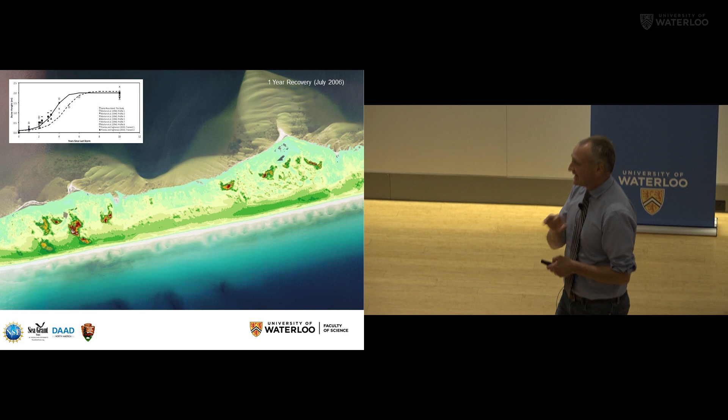What's more important is how does this actually start to recover? How does the sand get back to the dunes? How long does that take? And what we found was the first data to show that in fact it can take upwards of a decade for the sand. So what was actually 5 hours of one storm takes 10 years to come back.

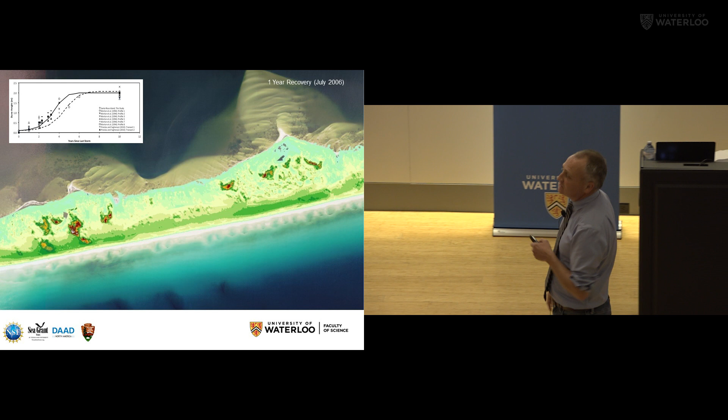Now that becomes a big problem when we start to think about the resiliency of these systems, and it's the one reason why we run a program called Coastie. This is in partnership with Parks Canada, and this is a citizen science program where you put your phone into a cradle and you take the same shot that everybody takes on that beach. And we are close to 5,000 photographs in a year and a half.

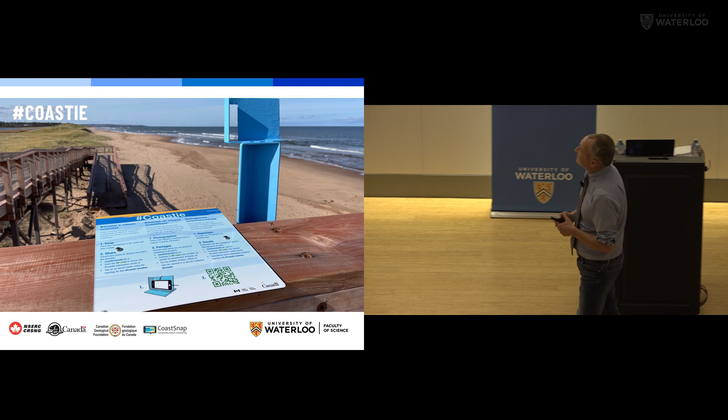And it's from around Parks Canada sites, particularly in the Maritimes and Ontario, and we're moving to British Columbia later this year. So as I said, it's distributed, so it's mostly in the Maritimes right now. We also have sites at Point Pelee, as well as the Bruce Peninsula and Pukaskwa up in Lake Superior, but we are moving to British Columbia and the Pacific Rim, as well as up into Nunavut next year with these sites, and it provides us unprecedented access to coastal sites.

And the reason why this is important is that myself and one other faculty member who just happens to be across the road at Wilfrid Laurier were the last two coastal erosion people in all of Ontario. And if you look at all of Canada, there's 5 of us. We have the longest coastline in the world and the smallest number of people who are actually studying coastal erosion. So the more people that participate through our program in Parks Canada, the more eyes, the more scientists that we are able to work with.

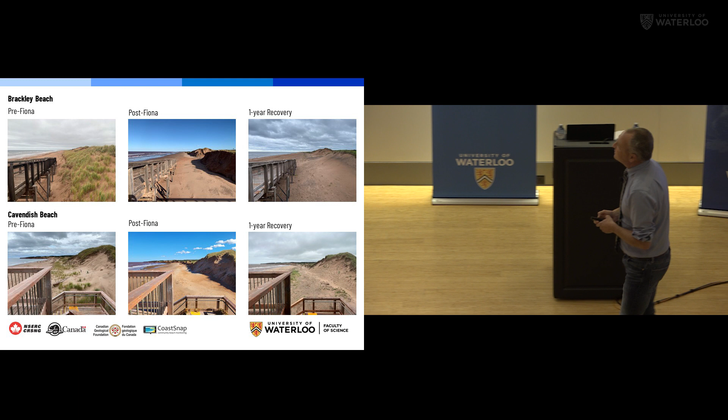And it's because of that that we were able to see what happened with Fiona. And so if you saw The National on CBC, you would have seen these photographs before. This is the Coastie shot just before Fiona at Brackley Beach, that one you saw in the drone shot before. This is the day after. 15 meters of dune was lost in just a couple of hours.

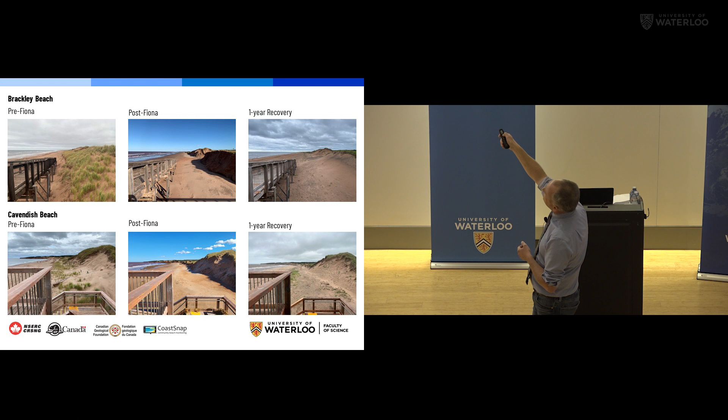And what we have seen today, and this is just yesterday, that's all the sand that's piled up. Now that looks like quite a bit compared to this. That's piled up because it's sitting behind a boardwalk. It's sitting behind an obstacle. If you actually look further down, the dune has hardly recovered whatsoever. We're looking at several years before these dune systems recover.

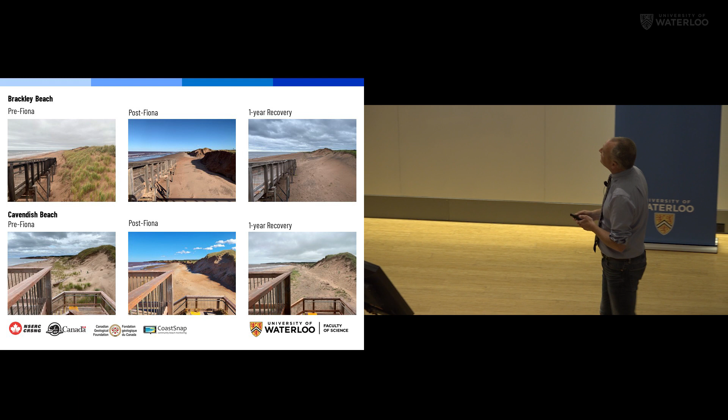Cavendish, this is the Anne of Green Gables site. Here's before, here's after, and that's yesterday. We just aren't seeing the recovery. The problem is not necessarily that these storms came through, it's that last week was Tropical Storm Lee, and it was bearing down towards Nova Scotia and PEI.

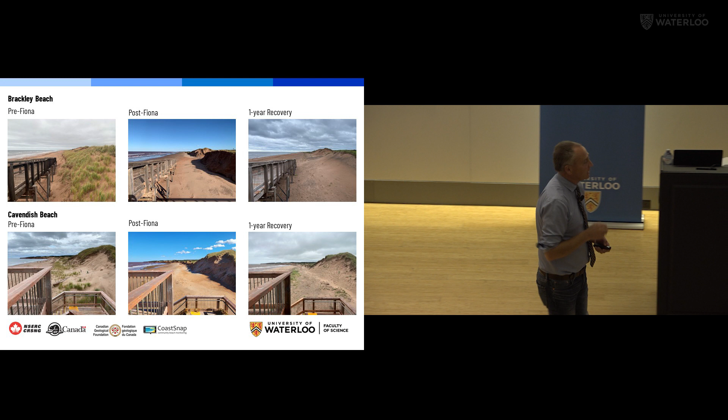Now, I'm a coastal erosion person, so I actually want the storms to go right up to my site. But if it hit on Prince Edward Island, these dunes would have been gone, because that was all that was required to take them out. What we're going to see over the next couple of years is unprecedented in the number of storms that are going to hit, how quickly these dunes erode before they can begin to recover.

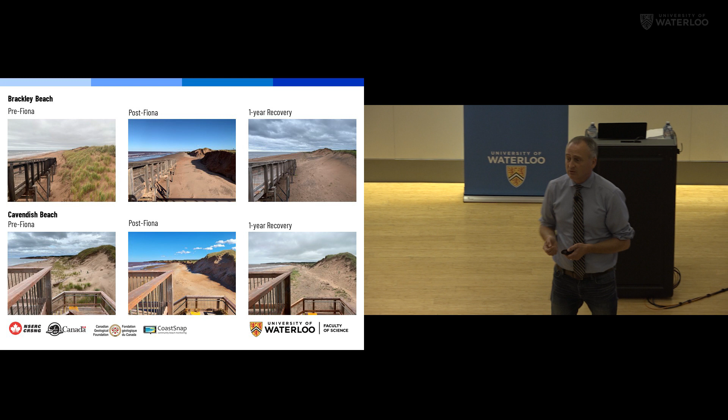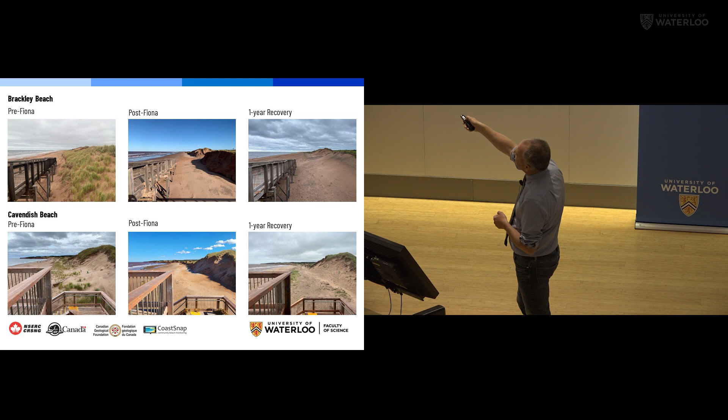Last year, there were 3 days when there was ice on this beach, which meant that every winter storm was able to come up and hit the base of the dune, and any recovery that we saw right after Fiona was gone. So it's not the big storms, it's not sea level rise, it's sea ice. And I'm going to show you a little bit later that lake ice in the Great Lakes is one of the biggest problems that we face.

Now, how do we deal with something like this? This is something called managed retreat. In a natural environment like this one, it's fairly easy. These beach dune systems are naturally dynamic.

But in the vast majority of our coastlines, what's behind there is infrastructure. It's roads, it's buildings, it's properties, it's livelihoods. In order for these coastal systems to be able to be resilient with sea level rise, changes in storm activity, and the loss of sea ice, you're going to have to require that people are going to lose their land, they're going to lose the roads, their houses. That's a very difficult management question. And this is managed retreat. Allowing things to move backwards is what we're also going to face in the Great Lakes.

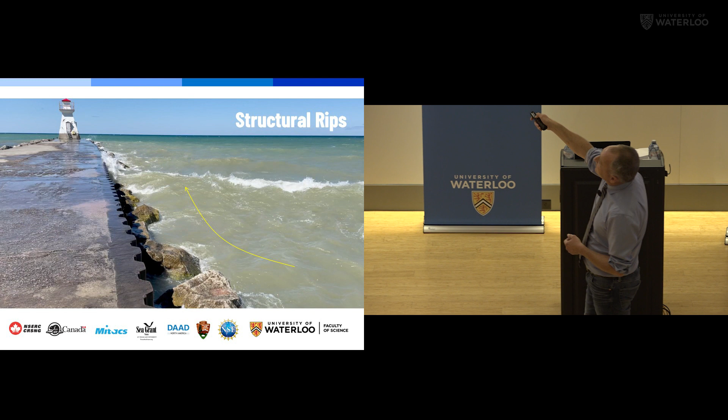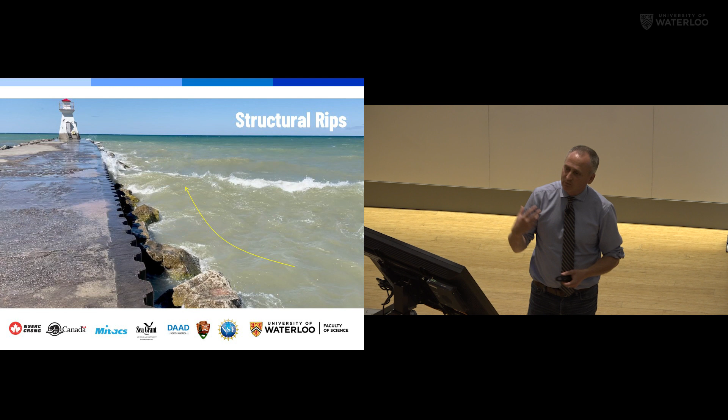Here's another one. This is Southampton. There is a rip current going straight off right here. But could you imagine falling into this water, being churned around? You don't know. So I've been in rip currents. I'm going to show you the one I've been in in a second. And when I take students into the field, we purposely get into rip currents. Now, we wear life jackets, we have lifeguards on the beach, and we have surfers out in the water.

But we get into these, and you're up and you're down, you're turning all around. You don't know what's left, right, up, down. You can't figure your way out. And when you get into something violent like this, it's really tough to be able to find your way out before you get out into the water. But this is one of the biggest problems.

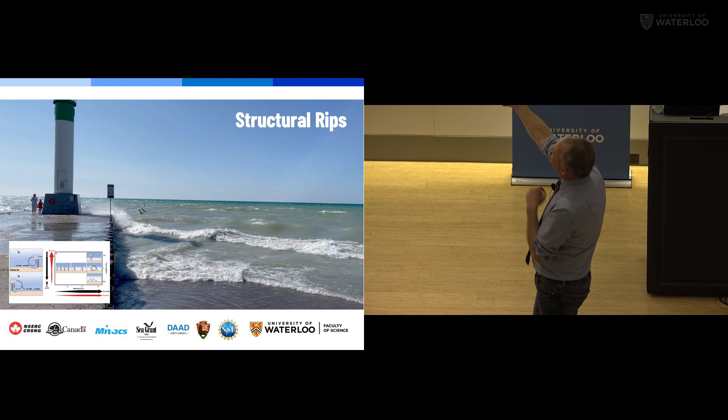Watch this kid. I told him off three times. So I did the boomer thing. I just said I'm a boomer. Okay. I did the boomer thing of telling this kid, don't do this. But if you look at the sign very carefully, the sign's backwards.

This is Kincardine. There was a drowning in Kincardine on this pier, on this side, three weeks ago. A family just simply got into the water, and a grandfather and their young grandson got into the water. They just jumped like that. There's a rip current right there. People just ignore signs.

In the Great Lakes, approximately 50 people a year drown due to surf. That means to waves and currents. The majority of them are young males, less than 30. Ontario has the highest proportions of drownings in the Great Lakes region. We only have 7 beaches in all of Ontario that have lifeguards. No other beaches have lifeguards. Kincardine has had many drownings, and has 0 lifeguards.

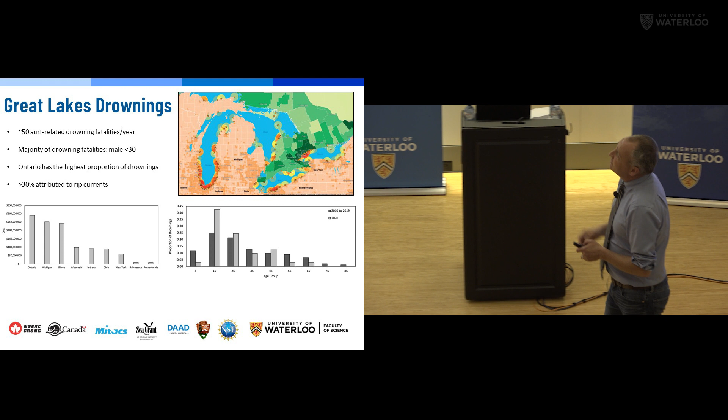Most of those, about 30%, are attributed to rip currents, but that's what we know, that they were directly into a rip current. We don't have a lot of information about that.

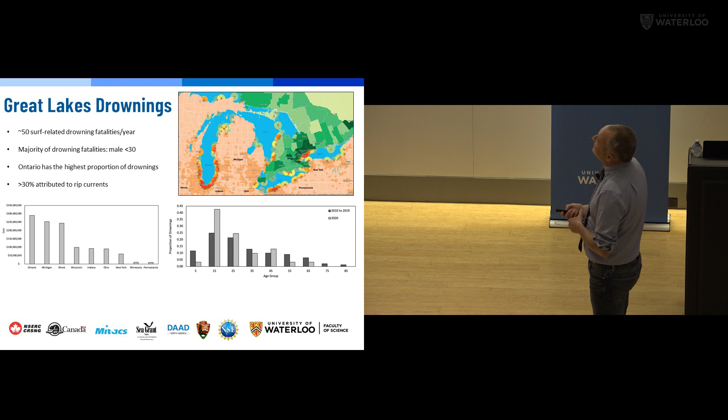Now, COVID was a big year for us to better understand drownings. What we were finding, and these lines that extend above, those were the COVID years. So during 2020, when everybody was in lockdown, you couldn't go anywhere. So the moment the lockdown stopped, people got out of their house. You couldn't travel internationally. You couldn't really travel far, so you went to your local beach. And what we actually found is that drownings increased significantly right after COVID.

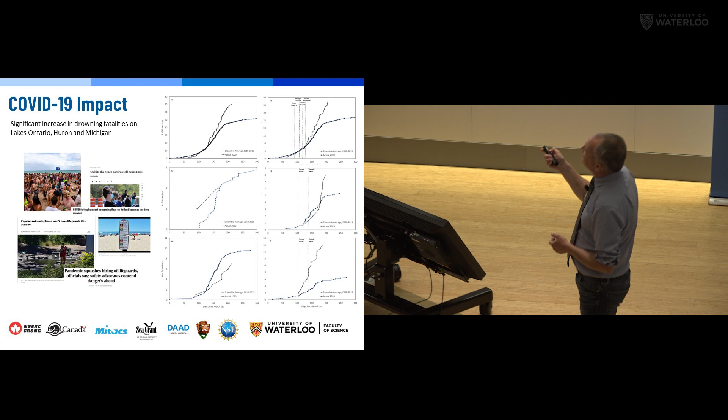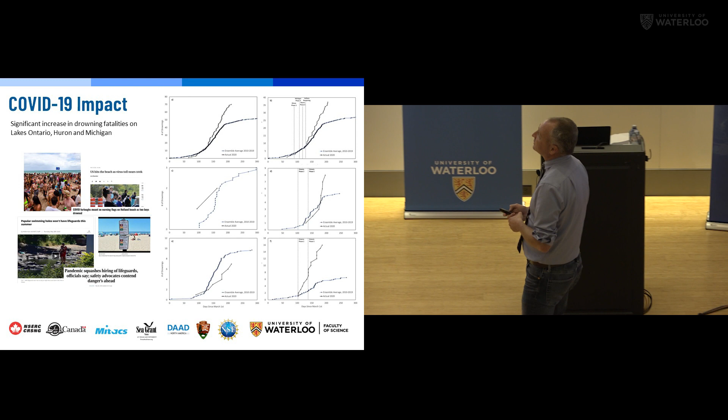And if you're going to a beach, you're going into these conditions, you're just being locked down. Why would you pay attention to a flag? Why would you pay attention to a lifeguard? And around most of the Great Lakes region, lifeguards were no longer on life-saving duty. They were on COVID duty, making sure that people were separated versus when they were in the water. So COVID created a spike in drownings, not only in the Great Lakes region, but across the world.

Now, why that's important is that when you look at all the drownings in the Great Lakes between 2010 and 2020, it cost this region $1.1 billion US. Because most of them are young males, less than 30. So if you think about the value of a statistical life, you've now lost an entire set of generations who are no longer contributing to the economy. And as a result, we have the direct costs and the indirect costs associated with it.

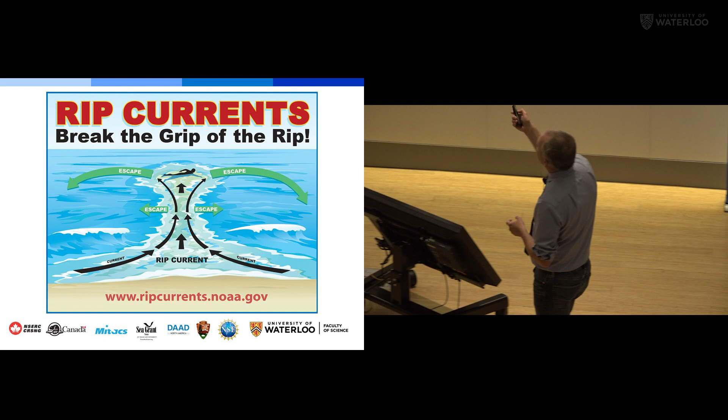The problem that we start to also face, and this is the original sign that was taken with that family in Pensacola, is that these signs are completely wrong. You probably have seen them across Canada, you've probably seen them across the United States. The image is wrong. And this is where I started working with psychologists and social scientists and opening up a new area of research. It's a view from nowhere. The water color is wrong. It looks rough there. It's green arrows, and the beach is in the wrong angle. This is what a real rip current looks like from the ground. Look at the difference between the sign.

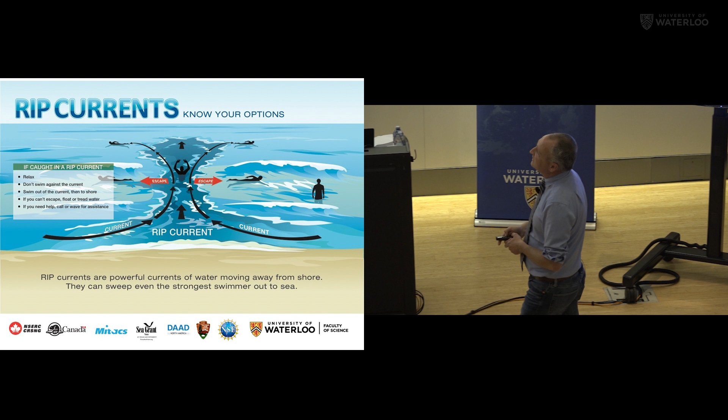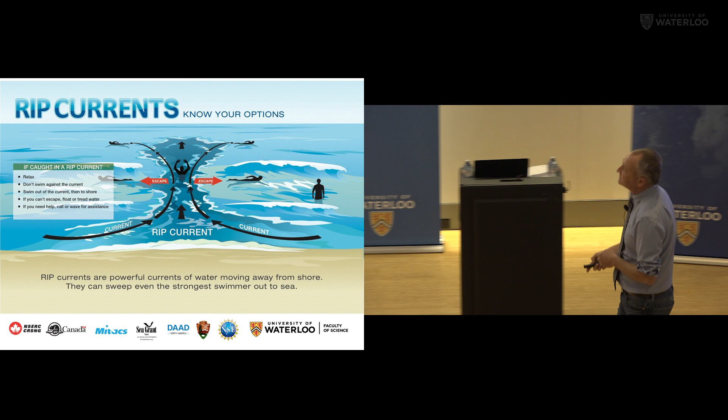But most importantly, and again, I'm going to come back to the sand here in a second, but I work in sand, I look at beaches and how they erode. The thing that I take home is that the work that we are doing is saving lives. So in Costa Rica, which I just happened to be working in many years ago, people approached me and said, can you send us a copy of your paper from Pensacola, Florida? And I sent them a copy, and I said, I'll do one better. I'll be at your office tomorrow morning to talk about rip currents in the country.

And as a result of our work in Costa Rica, where a lot of those pictures were from, we now have a legislated lifeguard association. Every major tourist beach has to have a lifeguard present. And it's because of this simple work, that family that first went down. This is what I take home at night, that this is the thing that you can make the biggest impact on. We've done just a recent paper looking at the value and the cost of drownings in Costa Rica. On average, every drowning costs $2 million to the local economy.

And it's a huge impact that they need to start to consider, because these lifeguards may combined get paid $20,000 a year. $20,000 a year versus every drowning is $2 million.

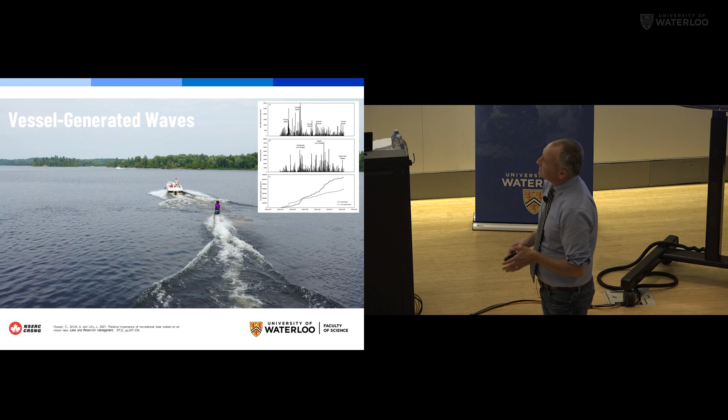Some of the work that we've also done in some of the kind of cottage country lakes,

and wow, this video is very sketchy. I did lose the drone right after this video. I didn't realize how bad it was, because I'm driving the boat right now. That's my son in the back. My daughter is taking the video. But the next video, my daughter was driving, my son was water skiing, and I was flying 1 foot off the water behind him, doing this kind of ESPN type thing, except that I missed the wave. I hit the wave and shot my drone straight into the water. I've gone through a lot of drones.

But what we have found in cottage country lakes, and this is where our cottage is, is that 80% of all wave activity is generated by boats during the summer. And so as a result, you've got this increase in wave energy, you've got shoreline erosion, and you've got, again, nutrient loading within your lake. And this is something that we're hoping to be finishing up in this coming year, and we have about 600 different sites within Ontario. But now let me get to Great Lakes shoreline erosion, the main focus for tonight.

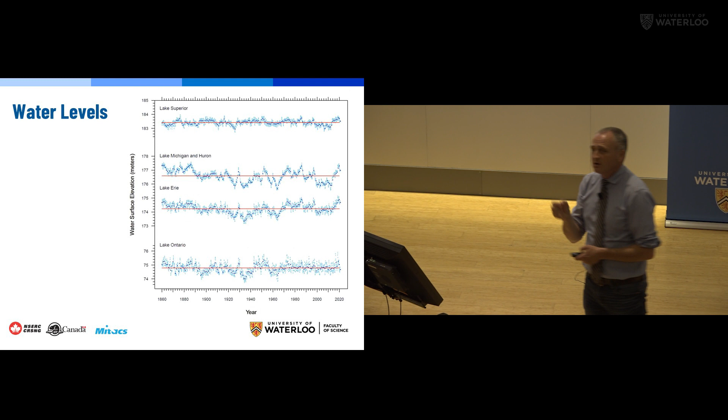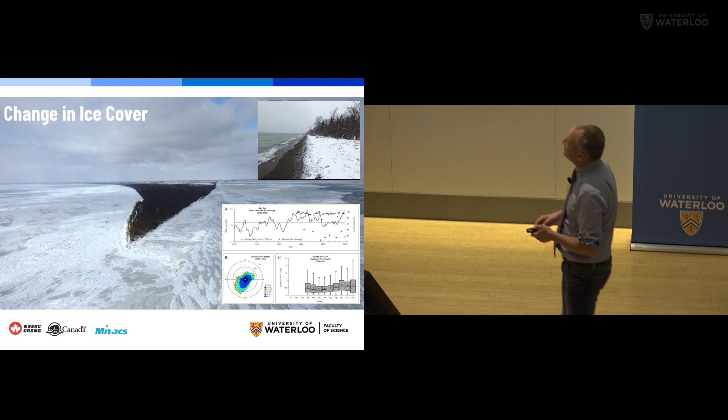The bigger issue is ice. This is Point Pelee at the maximum ice back in 2021, and this lasted for just a couple of weeks. During the 1940s, the ice cover on Lake Erie used to be thick enough you could drive a transport truck from Leamington to Rock and Roll Hall of Fame. What's it called? Where's it? Cleveland. From Leamington to Cleveland, you could drive a transport truck across. Now, hardly any ice is forming.

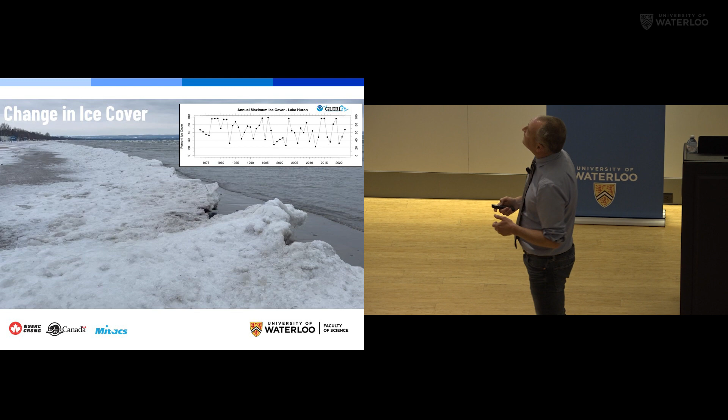As a result, this is a typical scene. This is, again, Wasaga Beach during the middle of winter, in the heart of February. There's no ice. That ice protects the water because it's stopping the waves, it protects the sand. This is another example. This is on the edge of Point Pelee, again, during February. This should be covered in ice. We just don't see it. And if you think about the temperatures of this week, think about how much they have been warming the lakes, which means your ice formation is going to be even later this coming year.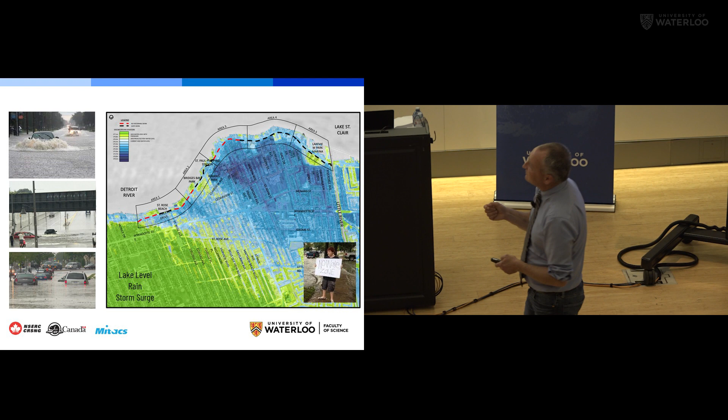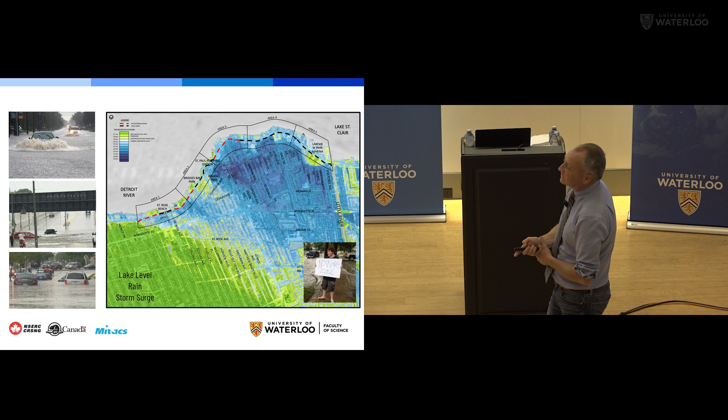As a result of the lake levels, the increase in rain, and some of these storm surges that we're seeing in the winter, this is Riverside in Windsor. So this is the Detroit River. This is Lake St. Clair. This is the area that floods during the middle of winter with our now winter storms that come through. At high lake levels, this entire region of historic homes is completely underwater. And this is great, like no wake zone. This boy holding up as cars were going down through.

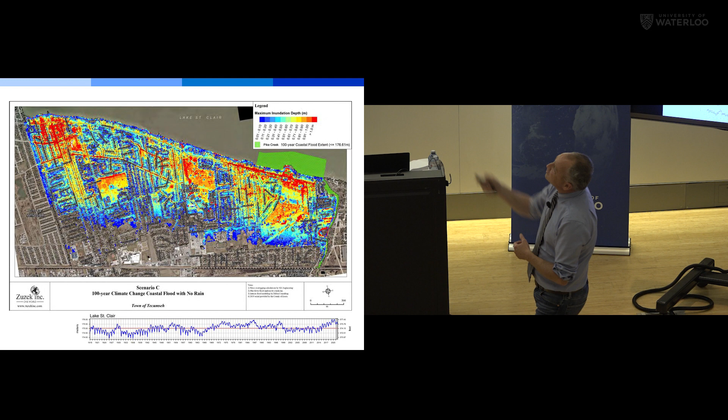This is the town of Tecumseh, so a little bit further to the east. This is what is being planned. This is work by Pete Zuzek, who is a coastal engineer: in the future, these areas in red are going to have more than 1 meter of water during the middle of winter, during these storms. So it's not just the lake levels, it's this increase in storm activity on top of the lack of ice.

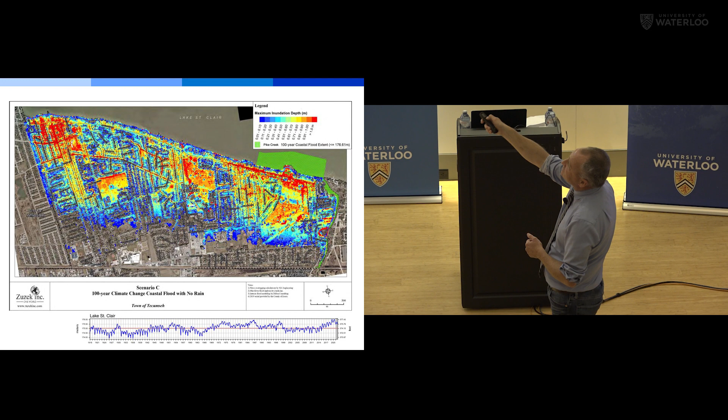How do you protect against any of this? Most of them, what they're doing now is putting up barriers. So what had been a natural shoreline is now going to be a wall. The most extreme examples are from the Netherlands, where they've just basically walled the entire country, but places like Houston, which is where the majority of our oil refineries are in North America, they're putting up something called the Ike Dike. This is a massive, like tens of miles of a wall that they're going to put up that they can lift and lower the gate as the tankers come in to try to protect the city of Houston, which is sinking because of groundwater extraction.

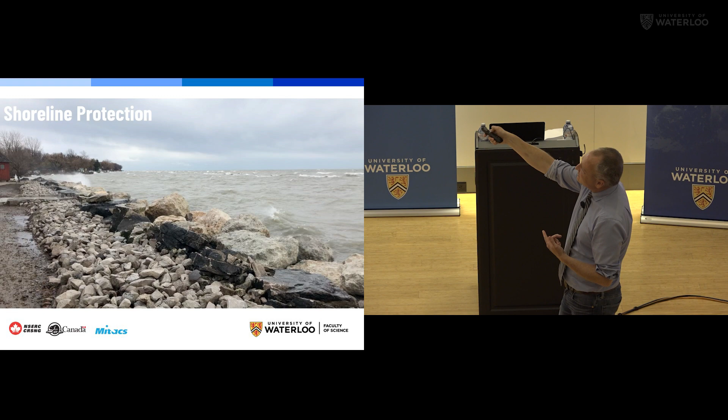But the other part to this is that when you start to protect these areas, again, this is Goderich, big rock wall. It's going to fail in a couple of years simply because it's now going to erode downwards. But anything that is downdrift along the shoreline from this location is going to be the point of erosion. So if I put up a rock wall, I'm going to stop erosion for about 10 years at my location. But now when the wave and the current gets over here, it's going to pick up new sand, which means now I'm going to have to put in a rock wall, which means this person's going to put in a rock wall and this one. So the moment somebody puts in a rock wall, a hardened structure, the next person down the line has to put one in or sacrifice their property, which means that these walls can't be done in small sections on individual properties. They have to be done over an entire stretch of shoreline where the sand is moving.

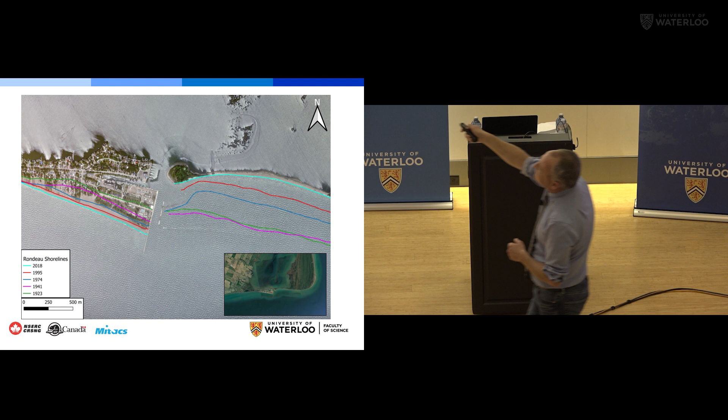This is an example. So this gets you back from 1923 in green all the way to modern day. We are talking almost a 500-meter loss of the shoreline. I'm going to show you some other locations in a second where we're averaging 4 meters of loss per year. This is 500 meters between 1923 and 2018.

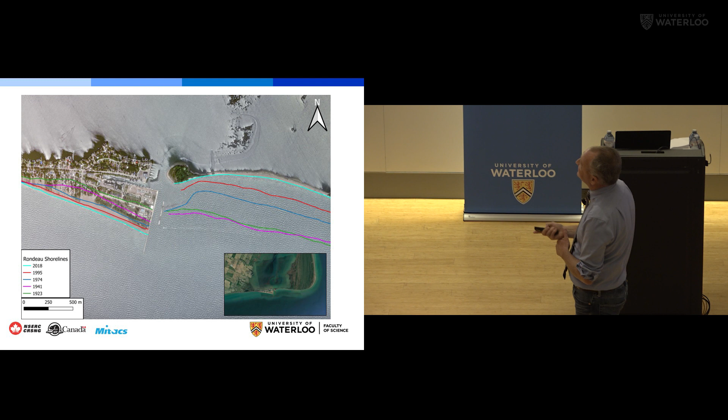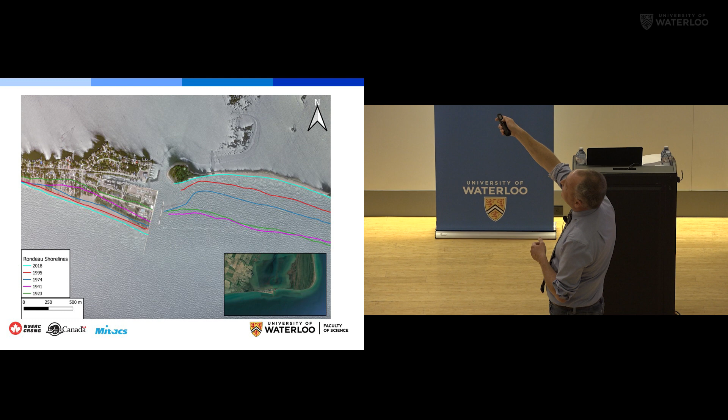Now, this is just because the sand is coming in this direction. It piles up right here and doesn't feed this area. As a result, this area is starved, it's eroding, and it's just simply eroding backwards. This is also something that we are seeing in Lake Huron at the Pinery.

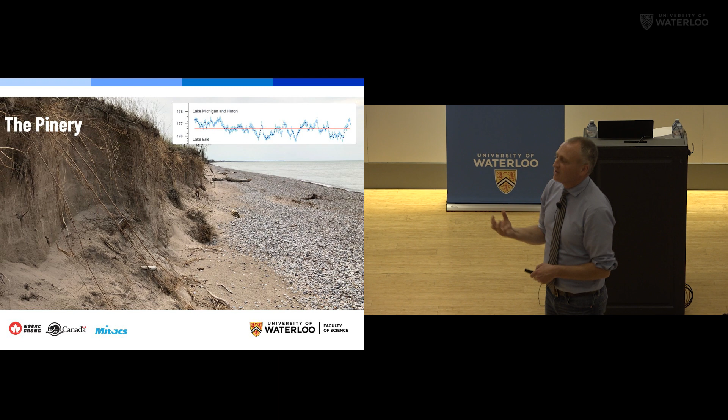Now, part of the problem is that these dunes were formed thousands of years ago, which means that they are historical features. They are not in equilibrium with current conditions in terms of waves and water levels, but they're eroding and they're valuable habitat. So this is what it's looking like today, and they're trying to figure out how it's going to come back, and they're revegetating parts of it. Revegetation does work, but it stabilizes it in its given location, and it doesn't address the major issue right at the water line.

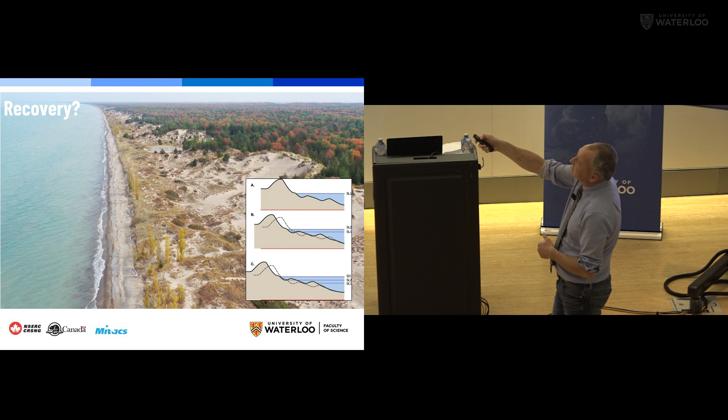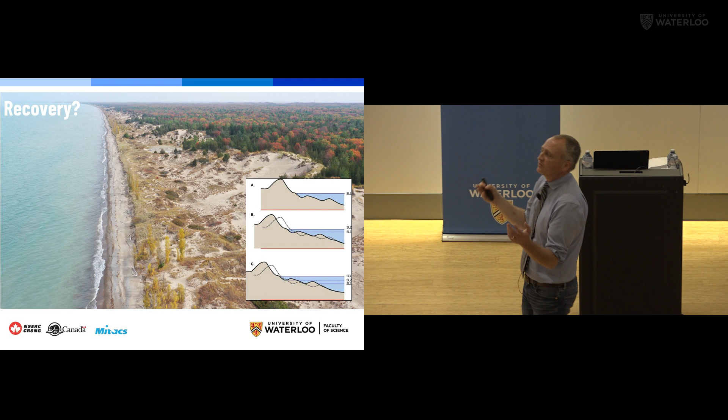These dune systems, they believe, are just simply going to migrate backwards. But there's no evidence of it. This model, which is being used to describe Pinery as a perfectly resilient site, comes from Prince Edward Island. Prince Edward Island is not the Pinery. This has wave activity, it's got sea ice at times, and it's got a sea level rise that's relatively constant. The Great Lakes do not have a sea level rise.

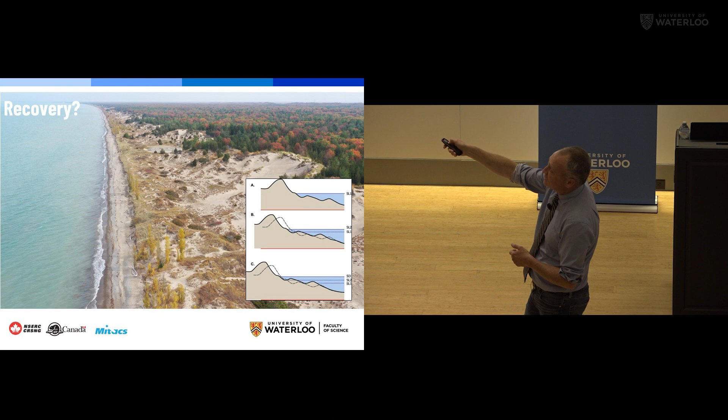What they have is a slow rise, and then an immediate plummet, and then a slow rise, and an immediate plummet. So they go through these cycles. As a result of that, the sand that gets taken out of the dune gets put into the bars, and the bars at Pinery are moving offshore. And as a result, the sand here will, in fact, never come back.

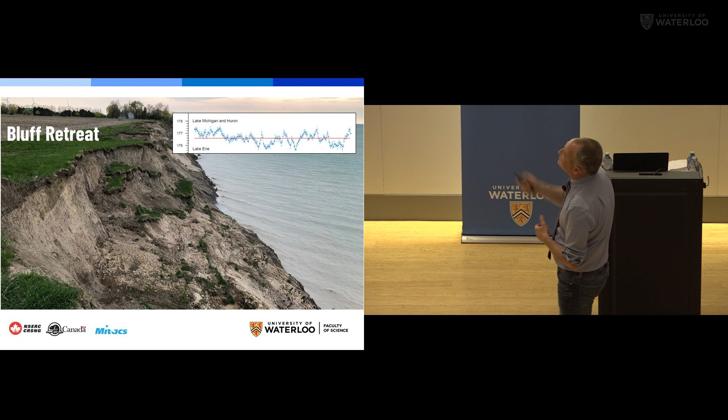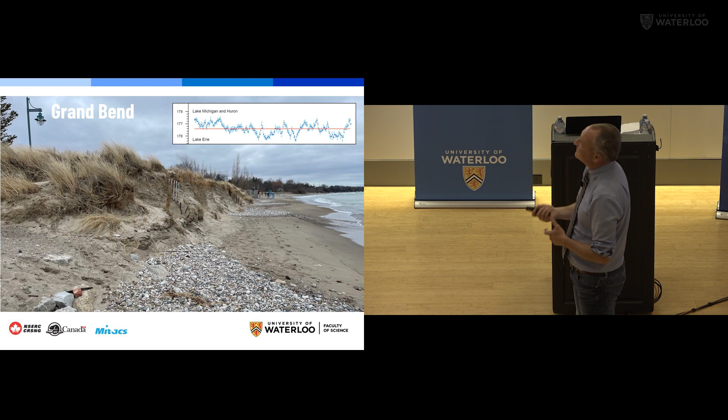But right now, projections for the Great Lakes with climate change are that we are going to get more wet and humid. And because we're having less lake ice during the winter, we're evaporating more water, more snow. More snow means that we are actually depleting that water level during the winter, but we're increasing it through the summers. So you get places like, sorry, this is Grand Bend. They're completely eroding their dunes, and they're not going to have the natural ability to come back.

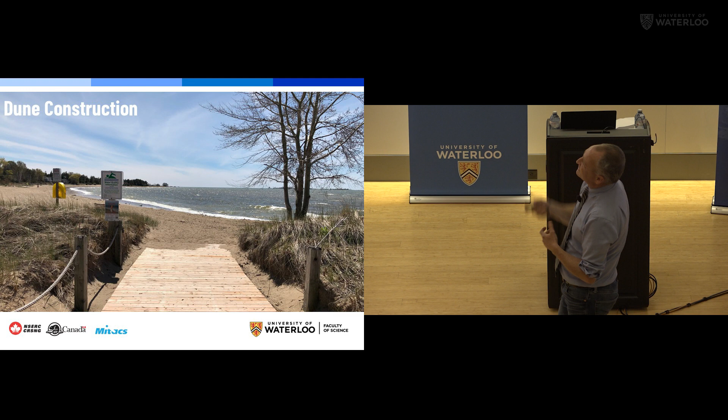Or places like Southampton, who are building dunes. These are not dunes, but they are pretending they are dunes. There's a program called the Blue Flag, and if you've ever gone to beaches around the Great Lakes, you'll see this blue flag flying. All they have to do is put a pile of sand and some vegetation and call it a dune, and they get a blue flag. It's not right. That is not a dune. That's not going to protect the shoreline. That is not a bank of sand that will be used to protect and allow the beach to recover.

Here's another example. This is Grand Bend. There are their dunes. Artificial. They don't work. They're not going to protect anything.

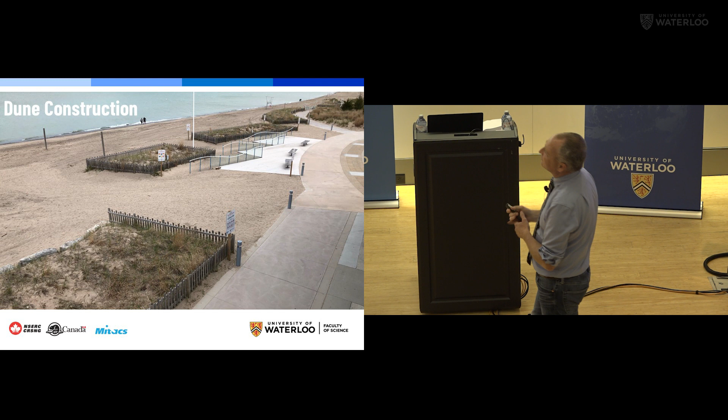They're not going to protect it against coastal flooding simply because you've got a big gap right here. So they don't work for flooding. They don't work for erosion. And they're really not habitat because there's a rock wall right there. So we're building these things that are not going to actually protect the shoreline.

Where this all starts to come together, I'm going to now move into Lake Erie, is that we have things that are called sediment transport pathways. So depending upon the way in which the waves approach the shoreline, you're going to be driving currents, and those currents move the sediment along the shoreline. And these are called littoral cells, an area where you're moving that sand back and forth.

And that movement moves into the sediment, and this area is typically filled with debris as well as very fine particulate matter. It's very, very cloudy, simply because this area is eroding so fast. These are old glacial till bluffs from about 10,000 years ago. So these are eroding in.

They're not only just affecting properties and moving at a very fast rate, they're also providing a supply of phosphorus that in Lake Huron may be helping to drive algal blooms, but in the Central Basin of Lake Erie may be helping to drive diatom production during the winter that helps to lead to the hypoxia. So this is not just about people losing their shoreline. This is about the overall health, the water quality within the Great Lakes.

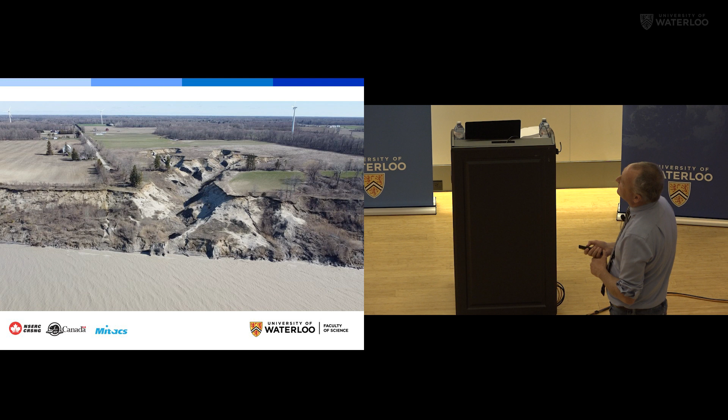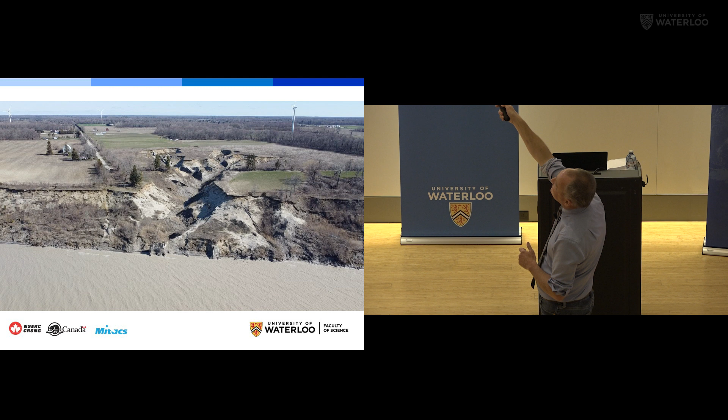And you get places like this. This is one of the most fascinating spots that we found along the Central Basin. This massive gully that has started to develop. You've got this cliff that's failing and these major slumps that are happening, and then because of changes in hydrology, after major storms, or in this particular case, they reconstructed a highway and redirected a stream, and this became the impact. All that sediment coming out of this gully into that water system.

Now, some people believe that that's really important, because just like in the Pinery case, all that sand that is being eroded from the cliffs here in the Central Basin goes to Long Point, and Long Point is surviving because of the bluffs. No one has ever measured that. It is a diagram from the 1940s that somebody drew an arrow. They drew those arrows on a map and said that sand must move from the bluff to Long Point.

So if you're losing your house, you're losing your property, what are you losing it for? Well, is it Long Point? But if it's not Long Point, why are you losing your property? But is there a way to stop it?

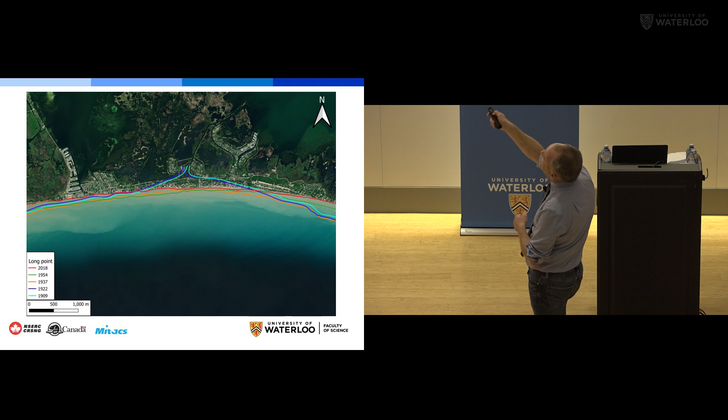Here's an example of what's been happening in this area just around Long Point. This area has eroded by about 200 to 300 meters, and as you move towards Long Point, it's also eroded. So even though the bluffs are failing, and the bluffs are believed to be a source of sediment to Long Point, both of them are eroding at an extremely fast rate. Therefore, the bluff retreat is not contributing to the stability of Long Point.

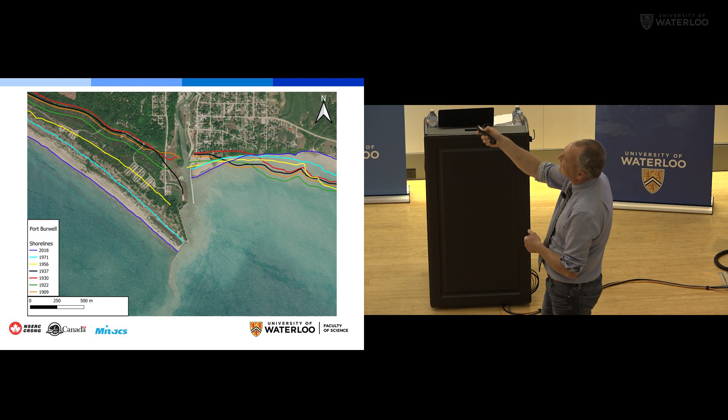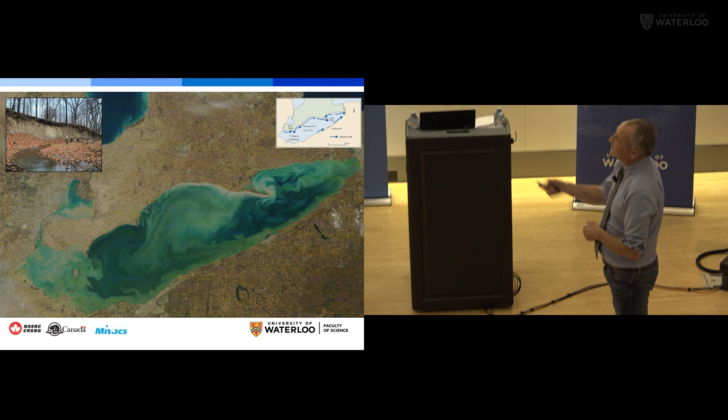You move a little bit further, you start to see a hinge point where, in fact, you are seeing some of these retreats. You get some of these gains. This is not natural. That's a jetty. So in fact, what we're finding is that the sand that is moving along the shoreline may contribute to Long Point, but not enough is getting there, and what is getting there is getting trapped behind a jetty. And when you combine that with river outflows, the bluff retreat, you're helping to contribute to algal blooms and hypoxia.

So I'm going to use one last example, Point Pelee.

I saw Patricia look at her watch, so I know I have to watch my time here.

Point Pelee is a historical feature. It's an old feature. This used to be a glacial moraine, a big pile of sand on which this point formed. It is not a dynamic point in which it was formed by waves and currents moving sediment from the coastline. It didn't come from the bluffs. It was there because the water rose and filled in that hill.

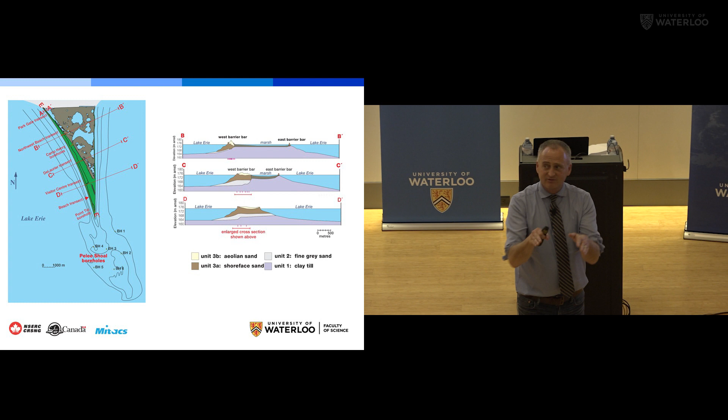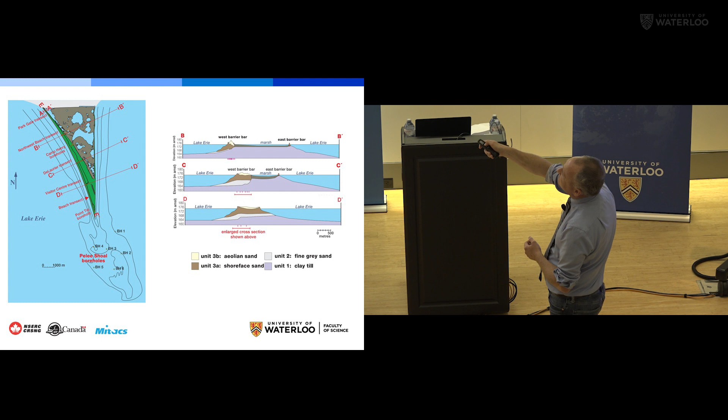So when the water was really, really low, it used to be a massive area of a high point. And as the water got higher and higher, it eventually formed what we know today as Point Pelee. So it's not a dynamic feature. It's old.

Again, with a moraine. So this old shoreline, that is the old shoreline of Lake Erie, back before Lake Huron started to drain into Lake Erie. And when Lake Huron started to drain into Lake Erie, the water levels rose, and simply that big hill got smaller and smaller and eventually became a point. And as a result, it's not in equilibrium with modern waves, currents, and water levels. But that's how they're trying to protect it.

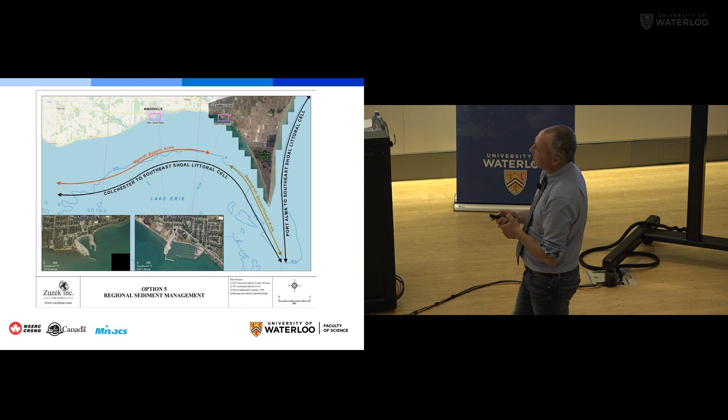They're trying to protect it by saying that the sand that is coming from Kingsville, Leamington, Wheatley is what is making Point Pelee the most biodiverse park in all of Canada. This is what Wheatley looks like, Wheatley Provincial Park. This is actually the highway. The highway actually comes straight out of the picture here. It's no longer anymore. They say that this sand that is coming off of this bluff is providing to Point Pelee. It's not. It's getting trapped behind the Wheatley Harbor. And that Wheatley Harbor, if you see the pile of sand here, that caused this area to erode.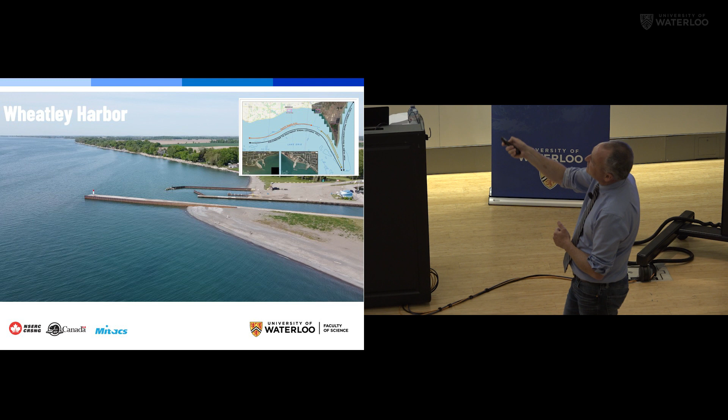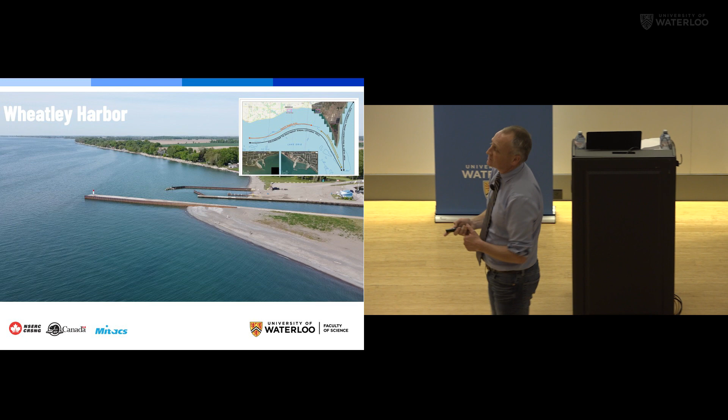And that area to erode, everybody who owned a cottage put up rock walls. They put up rock walls, they have failed, they have flooded. They put up new rock walls at about, again, $10,000 per 100 feet. And now the insurance companies have walked away. So there's no more building, no more sales of these homes, because the insurance company says, we don't want to be part of this.

And because of those rock walls, you're now depleting the sand that is moving towards Point Pelee. So Point Pelee is a historical feature that was never dependent upon the bluffs, but it needed a little bit of bluff sediment just to keep it in equilibrium. Now there's nothing. And these houses have blocked all that sand. But because they blocked the sand and those walls are failing, this is what's typically happening during big winter storms. The water comes up over the rock wall, fills in here. This is their septic tank. So all that water goes straight back out into Lake Erie. And that's why the insurance companies have simply walked away from this region.

But here's probably the most dramatic shot. So Wheatley Harbor is up here. Those rock walls are right along here where the houses were flooding. Look at the indentation of the shoreline. That's how much sand and how much Point Pelee has eroded just in the last 20 years. And then once you get past the trees and into the marsh, the trees were providing some level of protection. They've eroded even further back. And as a result, Point Pelee is shrinking.

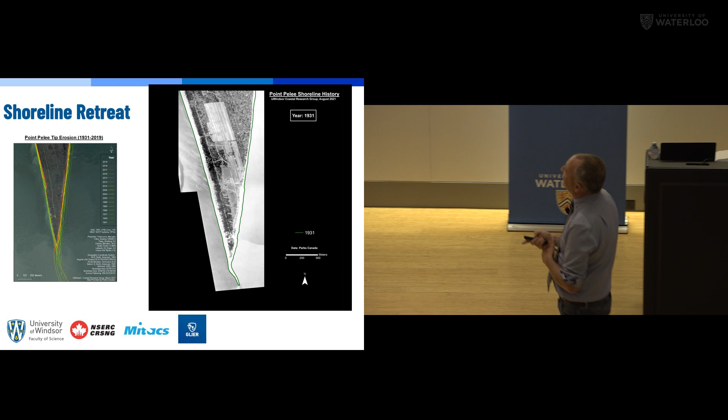But it's not only just shrinking, and this movie's not wanting to work here at the moment, it's primarily shrinking on the eastern side, which means it's shrinking and moving westward. But as it shrinks and moves westward, all of this marsh, so if you're a birder and you go down to Point Pelee, this marsh is one of your most important areas for birding. This marsh is constantly now being broken through by the waves, and as a result, the actual marsh area is getting lost.

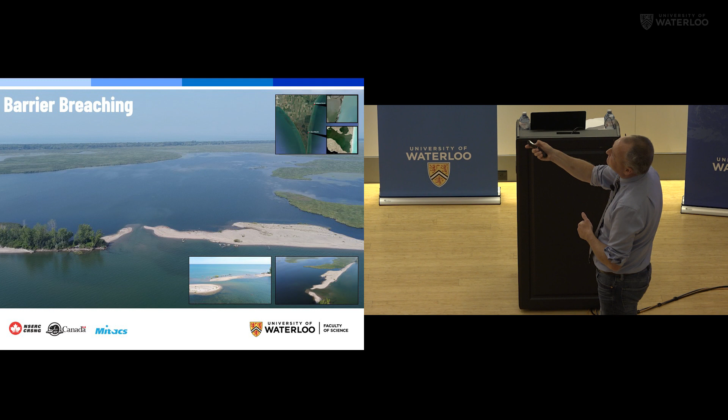This is what it looks like on the eastern side, just on the other side of the marsh. My son at a much younger age for scale there, and just looking at about a meter of sand that is lost. And you get things like barrier breaching. So to give you an idea, if you go to Point Pelee and you stand on the big bird observatory right there, this is the marsh in front of you. It's now broken through, and the waves and the currents move through. The chemistry of this marsh will change regularly with these water level rises.

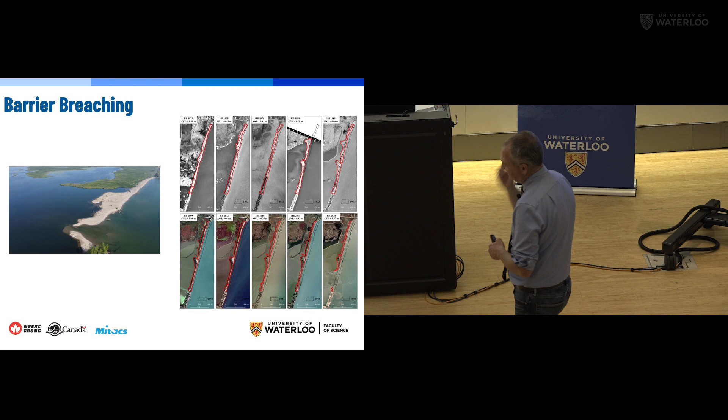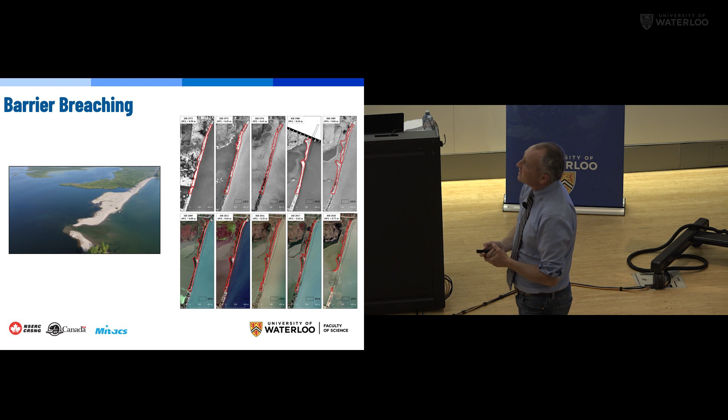But what we found when we started to monitor this shoreline is that this has been happening for decades, for centuries. And in fact, that was the old shoreline, that marsh. So if you start looking at these features, you can see that this has been obliterated and recovered many times, which is great, which means that this is part of its normal dynamic system. It's resilient, it's going to break through, but it'll recover. And this place here, which we call East Beach, broke through in 2020, stayed open in 2021, but now it's about half a meter of sand that blocks this entrance. Great. It opens up, closes up, opens up, closes up. The whole thing goes through a cycle.

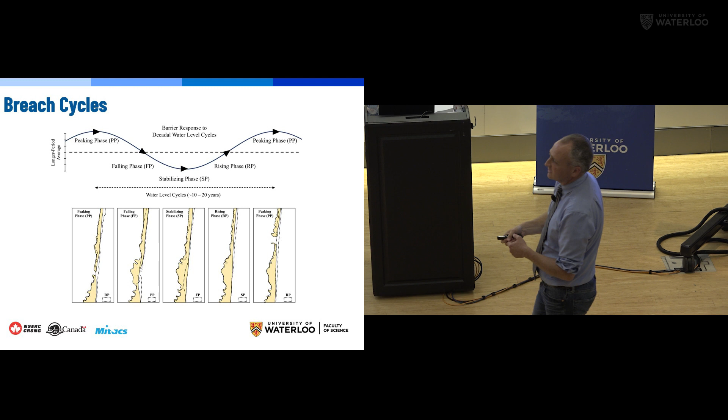At this particular beach, it goes up, and it comes back down, it goes up, and it comes back down. A hysteresis. Even as water levels continue to rise, the beach adjacent to it erodes, fills in the gap, and the whole thing recovers. Perfect.

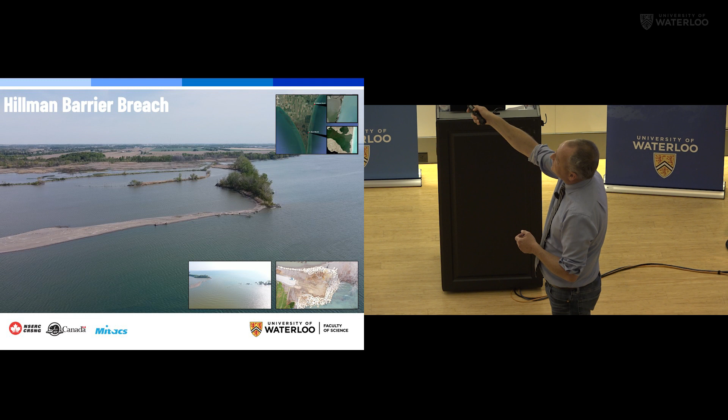That is great. But if I go to one other breach about 2 kilometers from that other one, this is called Hillman Marsh, and they're about to spend $20 to $30 million to protect this breach. Those houses with all the rock walls are right here. As a result, that's where the shoreline used to be. This is where the shoreline is today, and it's completely opened up, and this Hillman Marsh is no longer a marsh. They're going to put in all this money.

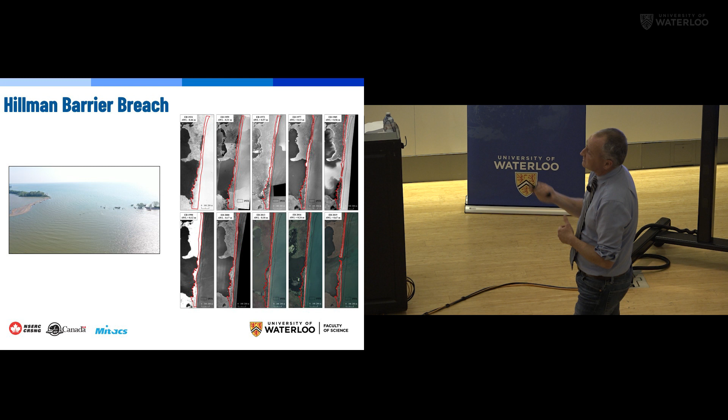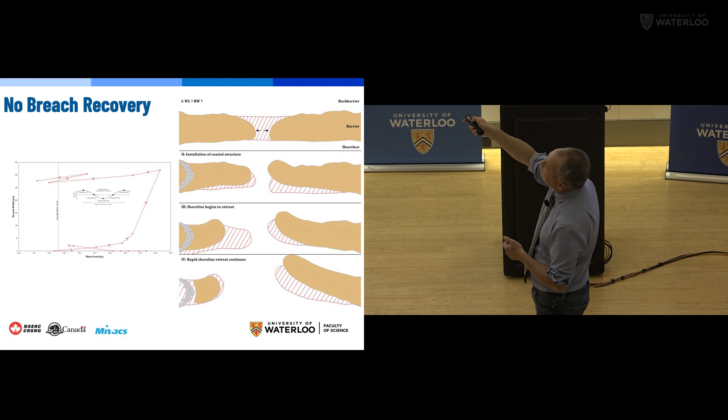When we looked at this, historically, this did the same. It opened up, it recovered. It opened up and recovered until people put in rock walls, and now it can no longer recover. As a result of the rock walls, apologize for the really bad cartoons here, but for this rock wall, there's no longer any sand, which means that even when water levels start to fall, the breach has stayed open, and this breach will never close. They're again putting in tens of millions of dollars to protect this.

And this is what it looks like from the ground. I'm standing on that one rock wall, there's the breach, and this is what happens during the winter now, is that these big waves come in, you're affecting the vegetation, you're ripping it up, you're changing the chemistry, and you're changing the fish species within that marsh. Again, historically, over long periods of time, that's great. That's part of the whole rejuvenation of that marsh. But now this thing will never recover.

So what we're seeing in large parts of the Great Lakes is that there are some areas that naturally recover. And there's other areas, because of the lack of sand, they'll never recover. So now they're talking about, in Point Pelee, nourishing the beach. The problem is, when you look at this line where the old shoreline was, that's almost 5 meters deep now. 5 meters deep over a distance of about 5 kilometers. Think of the volume of sand that you would require to fill in that hole. We simply don't have it.

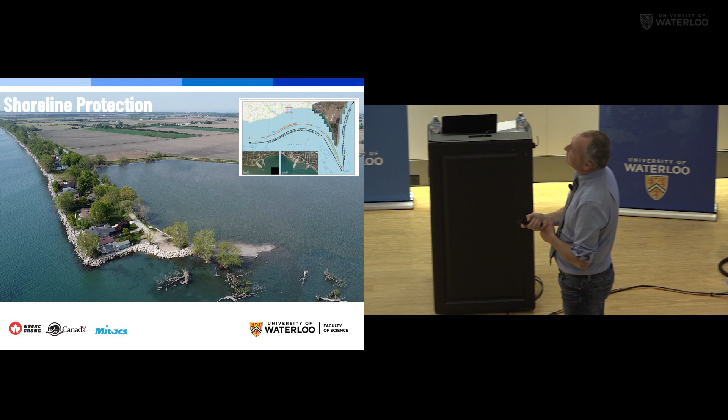Hillman Marsh, they're going to nourish it. They're going to put rock walls to protect the marsh. Opposite to what is needed from a sediment perspective. They're going to put in more of these structures because they're not affecting this. This is the largest freshwater commercial fishery in the world. That harbor is really important. So you can't get rid of this jetty. You got to keep the harbor, and everybody is now protecting their shorelines. So you've starved the environment. It's happening on the west side, but on the west side, it's not as deep.

I'm just going to watch my time here.

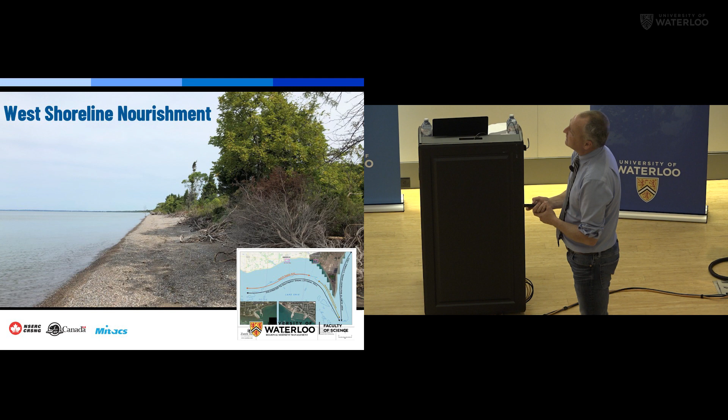So where do you get the sand? How do you nourish this? It's the end of Point Pelee. All this sand that's at the end of Point Pelee is part of the old moraine, but it used to be in the cliffs, in the bluffs. So the idea now is that we take this sand from the end of Point Pelee and put it right at the very beginning and let it come through. And you basically create a circulation system, a pump, where you take it from the end, you put it to the beginning, and you just keep it circulating back and forth.

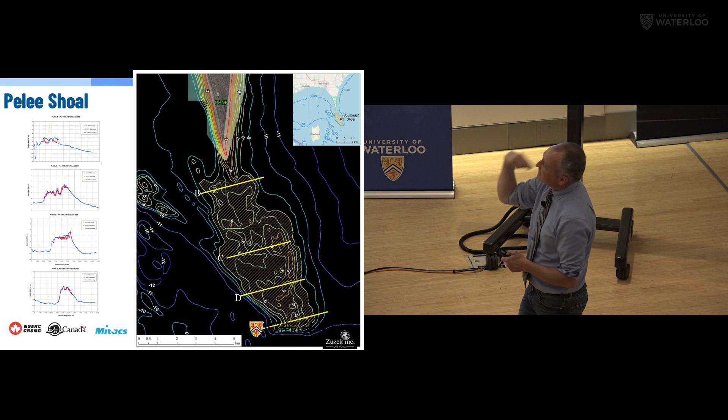And this sand might be needed for Long Point, might be needed for Pelee. We simply don't know. But people's livelihoods, people's homes, including some alumni from Waterloo, they're being affected by this. And that's one of the things that we're trying to figure out, and ultimately where that sand will go.

Now that is the main ending slide from this talk, but I want to talk about one last slide. And this is something that I didn't tell you at the very beginning. When Mario was telling you that I went to Guelph and went to Toronto and I did sand, I actually was not going to university for sand. I learned that beaches are really amazing, so I made the right choice. I was originally going for music and looking at U of T to go into the Royal Conservatory. That's where I was heading.